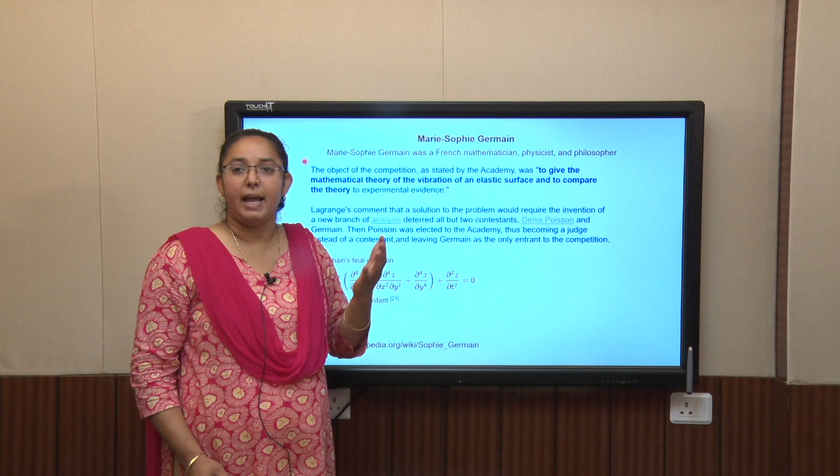During the competition, this topic was assigned, asking whoever would give the equation of motion, and that theory should predict the experimental results. Euler and Lagrange, famous mathematicians, commented that the solution to the problem would require the invention of a new branch of analysis. Then Poisson was elected to the Academy, thus becoming a judge instead of a contestant and leaving Germain as the only entrant to the competition.

She developed the first theory of plates, but at that time calculus of variations was not evolved properly, it was in the initial stage, so there was some discrepancy. This theory could not give accurate results in experimental validation. Later on Kirchhoff did some correction and developed the plate theory. These days we say Kirchhoff's plate theory or Kirchhoff's assumptions, sometimes instead of classical plate theory. Kirchhoff's name is given to the plate theory, but before that the basic equations were given by Marie-Sophie Germain.

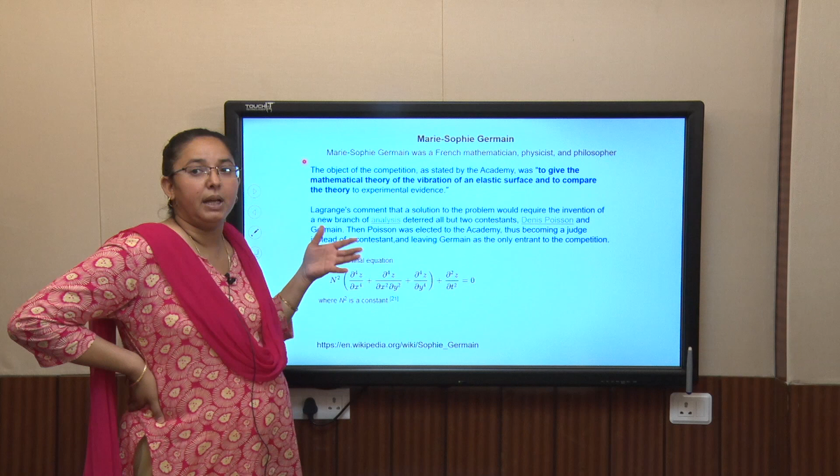It was an area of mathematics; world-level mathematicians were in this field, developing the theoretical analysis for a plate or a beam. In the Euler-Bernoulli beam, Euler was a mathematician, so he developed a beam theory. Similarly Kirchhoff and Lagrange were mathematicians who also made good contributions in physics. But Timoshenko is a very famous name. Everybody, whether undergraduate, masters, or PhD students, has sometimes encountered Professor Timoshenko's books: Theory of Elasticity, Elements of Strength of Materials, Engineering Mechanics.

He is considered to be the father of modern engineering mechanics. Mathematicians developed the theories, so they were difficult to understand for people with an engineering background. Timoshenko was the first person who tried to simplify them, explaining from a physics point of view, so that engineering students and researchers can understand theories like theory of plates and theory of elasticity. These books are written in a very simplified manner, so students without a very strong mathematics background can understand these concepts, and engineers like us can contribute to the development of plate theories.

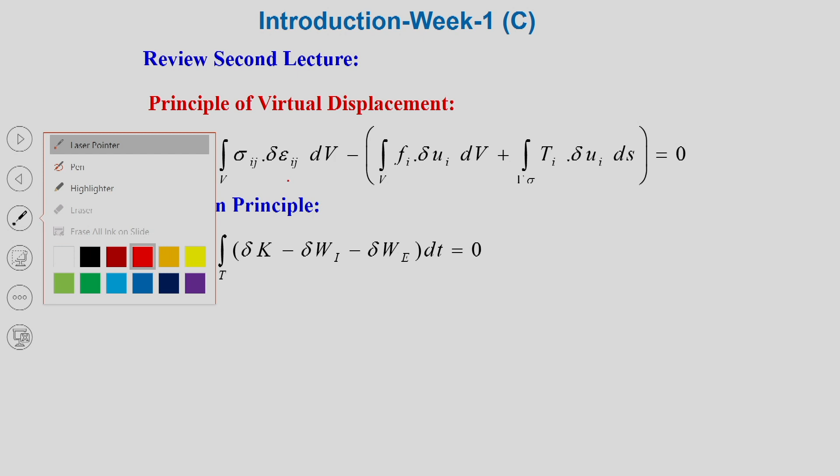So I would like to do a slight correction here: it should be plus, not minus, because already it is minus. If you put it as minus, internal work done will get a minus sign and external work done will get a plus sign.

So most of the time during the first course of solid mechanics, we used to teach the concept of plane stress. This is very much required, because it is a simplified version. Most of the time the thickness of the body is not very high compared to the length and width. Then we can apply this assumption of plane stress. So in 90% of engineering applications, this assumption holds good.

So before proceeding to the main theory, I would like to explain what is the concept of plane stress. For some engineering problems, the state of stress for a thin body or structure is required, in which the dimension along the thickness direction is very small compared to the length and width of the body.

If you encounter a basic fundamental structural element in which length and width are comparable, but thickness is very small, it means you can find out the state of stress of that body using the plane stress assumption. For such problems, the stresses in the z direction become very small. There is also a physical concept behind that: since thickness is very small, it cannot take too much stress.

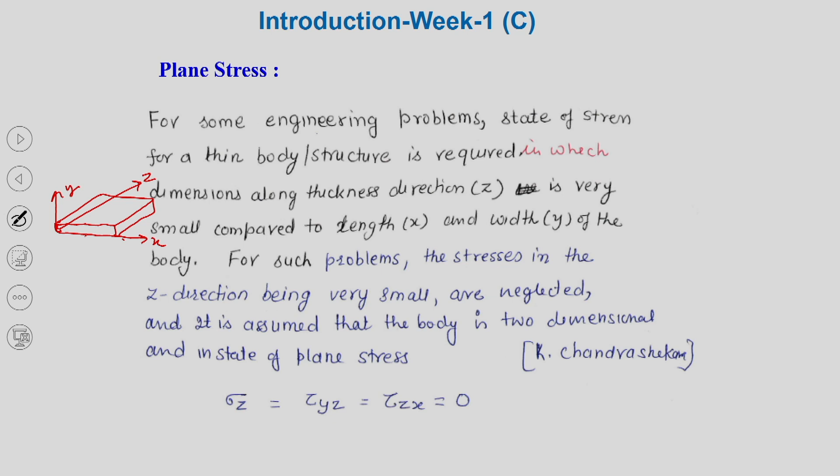Most of the time students get confused here. Let us say a system like this, but I have assigned this axis as x, this axis as y and this axis as z. So you see that along the y direction thickness is small compared to the x and z directions. If you assign the coordinate system like this, then along the y direction stresses will be 0. What will they be? Sigma yy, tau yz and tau yx will be 0.

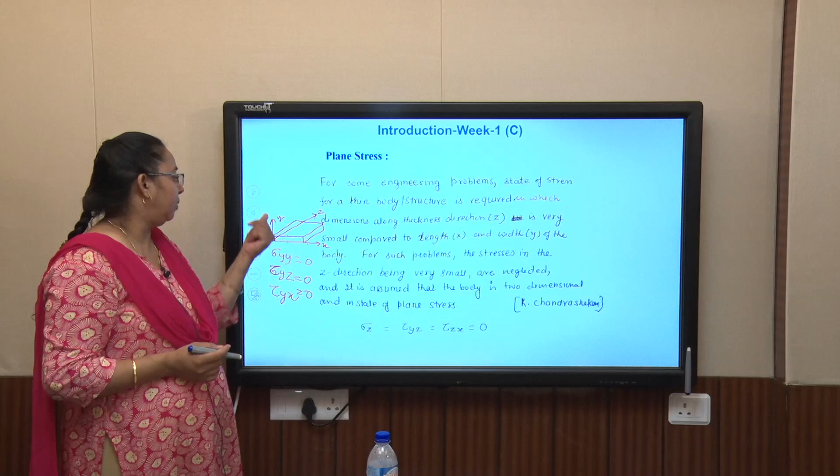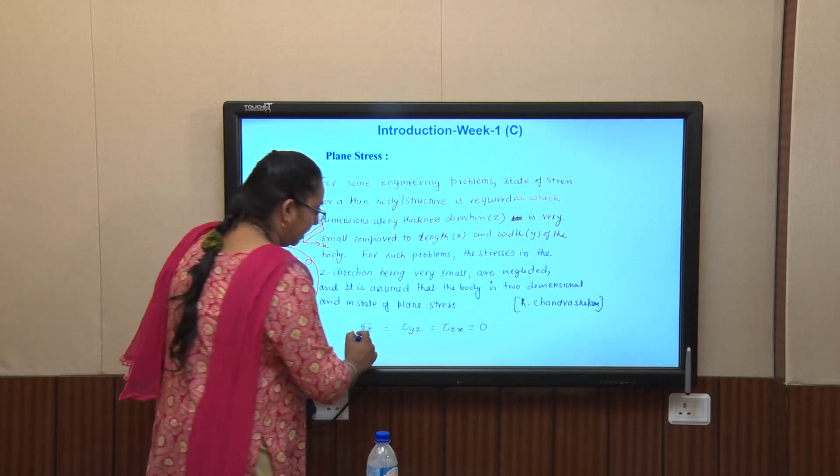So, at the time of interview or when you are going to develop a theory, you did not take care and you have modeled this plate like that, y vertical, x and z longitudinally. In that case the following components have to be 0 if you are applying a plane stress assumption, not this. So, this is when z is the thickness direction.

So, plane stress application, how much? I said that length and width are comparable, but thickness is small. What do you mean by small? This is a qualitative term. What is it in terms of quantity? Which thing can you call small? 0.1 mm is small or 100 mm is small as per your dimension.

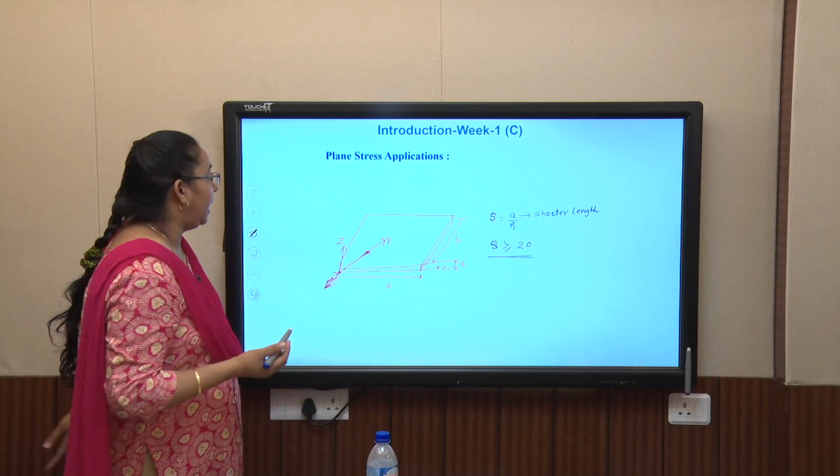Sometimes in civil structural applications, the slab thickness may be 100 mm, equal to 10 centimeters. You say no, it is very big, but if you see, this may be 10 meters long like the roof of this room, or 5 meters long. So, compared to that, if it is 500 centimeters and it is 10 centimeters, then the ratio is coming 50. So, that slab can be analyzed as a plane stress element.

So, you see S, the length to thickness ratio. If this S is greater than or equal to 20, definitely we can apply the plane stress assumption, and the theory will predict more accurate results, near to the experimental results. But if you have S equal to, let us say, 4,

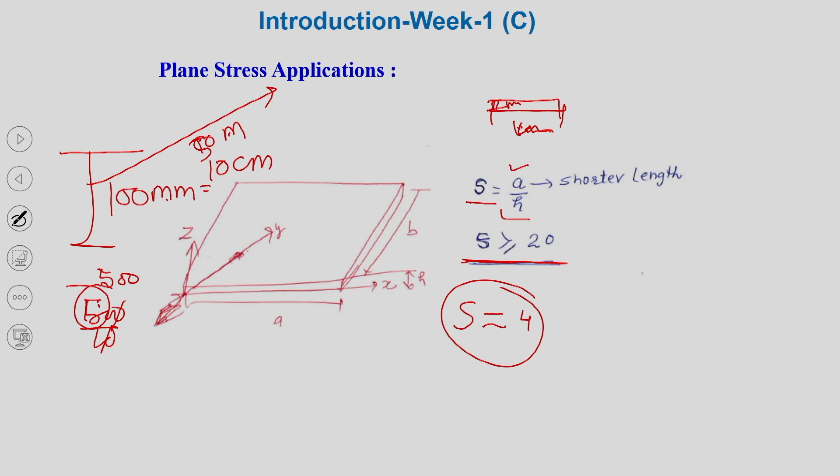then it is not. Like for some mechanical components, you may have 1 mm thickness and this may be 10 centimeters, or this may be 10 mm and this may be 2 mm thickness. You say that I would like to analyze this as a thin plate, but under that assumption it is not possible under plane stress, because length is 10 mm and thickness 2 mm. So, it is giving a length to thickness ratio of 5. So, it is becoming thicker. So, this thickness can resist.

So, most of the time these basic concepts are not well taken care of. You have gone through courses on advanced elasticity, theory of elasticity, theory of plates and so on. But if you do not take care of this and you develop without considering this aspect ratio, whether my theory will be able to predict these things or not. So, when you are going to analyze a structural element, you must first find out these things and then accordingly choose the theory. I will explain that a number of theories are available for different kinds of thickness ratios.

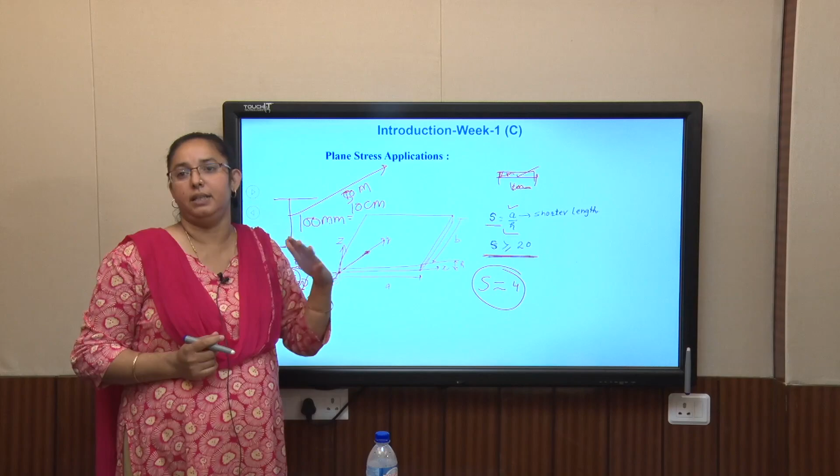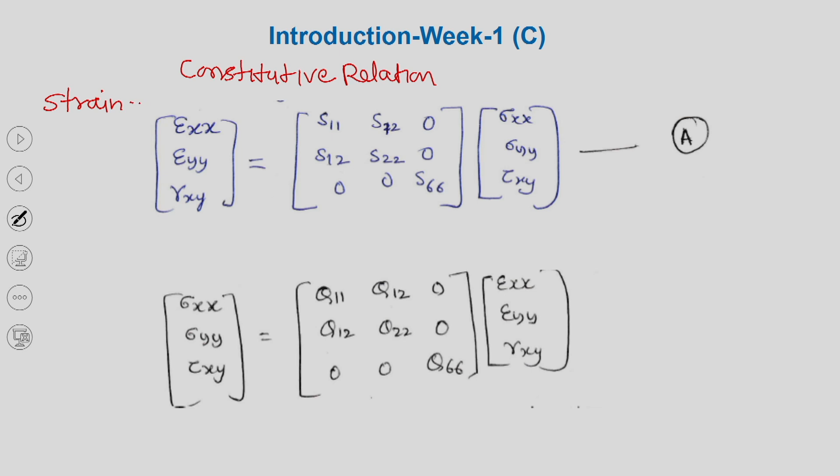So, under that plane stress assumption, the constitutive relations, I would like to say strain and stress relations. We have assumed that sigma zz is 0, tau yz is 0, tau zx is 0. So, you will get only the non-zero components sigma xx, sigma yy, tau xy and their compliance coefficients. So, this is, I would like to say, the reduced strain stress relations for the plane stress case.

Now, if you want to invert it, inverting it gives stress strain relations, where it is represented by Q11, Q12, Q12, Q22, Q66. So, stress strain relations for the plane stress case are reduced to this, where Q11, Q12, Q22 are nothing but Qij, where i goes over 1, 2 and 6 and j also goes over 1, 2 and 6.

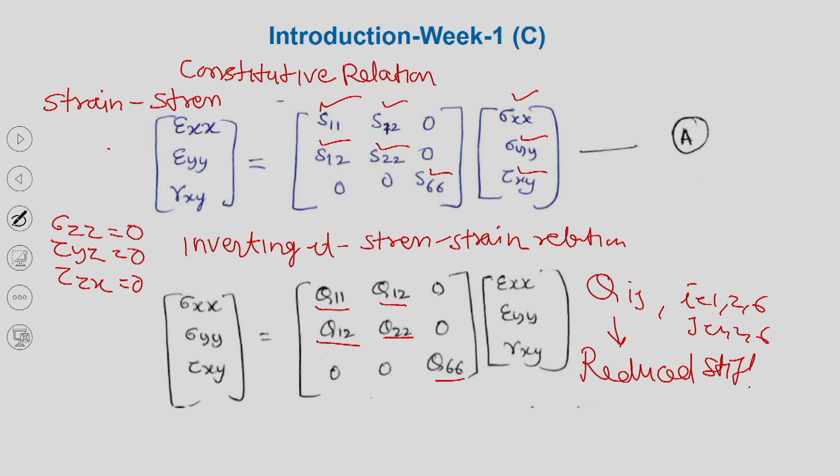They are known as the reduced stiffness matrix, or reduced stiffnesses. Then what are these in terms of compliances? You can see if you are inverting a 3 by 3 matrix S11, S12, 0, S12, S22, 0, 0, 0, S66. If you are inverting that matrix, let us say any matrix S hat, so invert.

So, in that it will have those components S22 by S11 S22 minus S12 square. These are in terms of compliances. As I have told you, engineering constants we are more familiar with, like Young's modulus and Poisson's ratio. Generally, we are able to calculate the mechanical property in terms of engineering constants, because we have a UTM, where we can directly find out the Young's modulus E1, and similarly we can find out the Poisson's ratio or shear

modulus. So, in terms of that, one can see that if it is an orthotropic material, it will be Ex, Young's modulus along x direction, over 1 minus mu xy mu yx. So, the Poisson ratio mu xy is not equal to mu yx for orthotropic material. This is a very important thing, and if you want to write in terms of 1, 2, 3 index form, E1 over 1 minus mu12 mu21, which is equivalent to C11.

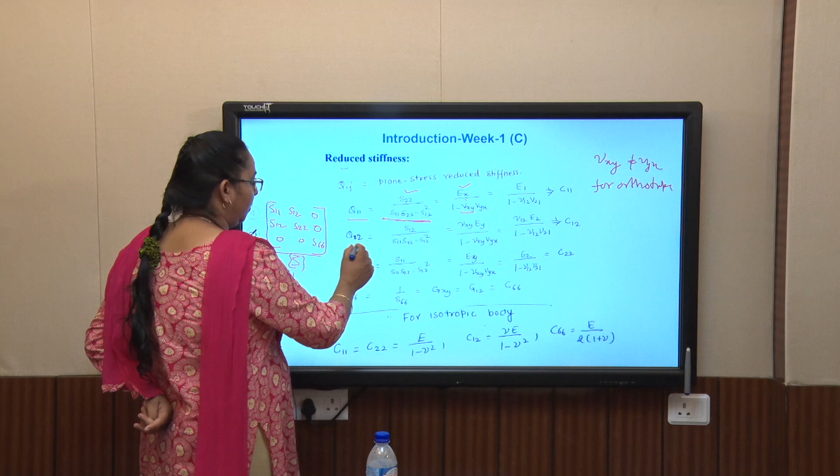Similarly, Q12, Q22, Q66. Q12 is C12, there E2 over 1 minus mu12 mu21; this denominator remains constant, you can remember that. See, Q12 means mu12 and E2, Q22 means E2, Q66 is nothing but Gxy or G12, C66. For the case of an isotropic body, mu12 is equal to mu21, then this relation reduces to E by 1 minus mu square.

So, most of the time when you are going to develop a plate governing equation for an isotropic plate, you need just E over 1 minus mu square. So, you can obtain Q11. Similarly, Q22 will be the same, and Q12 will be mu times E over 1 minus mu square, and these standard sets of relations are given in the book. You can go through the K. Chandrashekhara book or K. Bhaskar book; both are given.

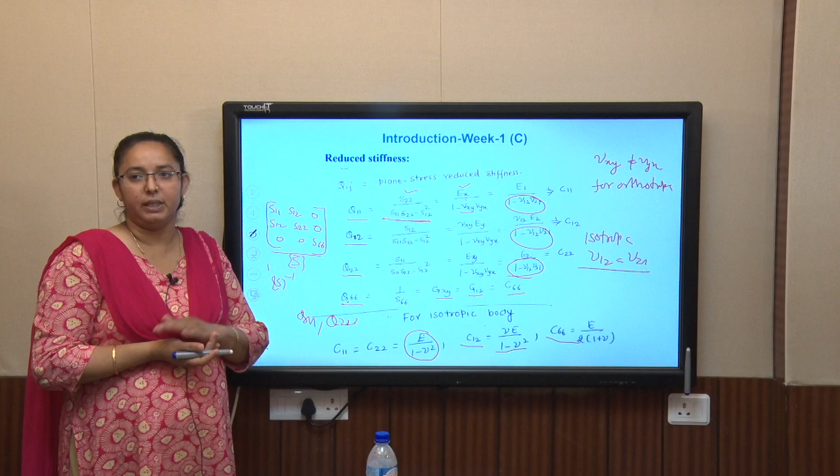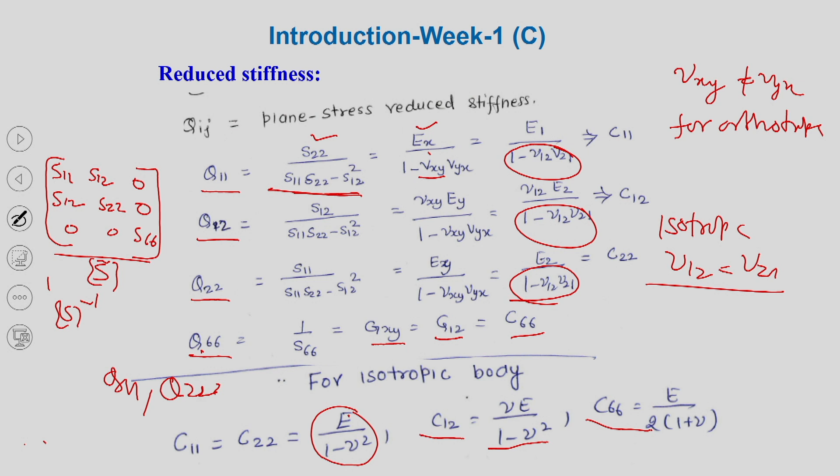You just have to be aware these kinds of things are available. You need not remember the expression of Q11. You must just know there are things like Q11 and Q22, they are the reduced stiffness matrices, and their elements look like that. So, when we are going to apply a plane stress assumption, we have to use Q11, Q22 instead of the normal stiffness matrix. Now, the concept of plane strain and its application.

Plane stress, I have told you, is when thickness is very small. What is the concept of plane strain when you are going to analyze? Let us say there is a bridge or there is an LPG storage tank. I would like to draw it here. LPG storage tank, or you can say an oil storage tank. You will see that whatever the radius, this length may be up to 70 meter, and this may be up to 2 meter or 3 meter,

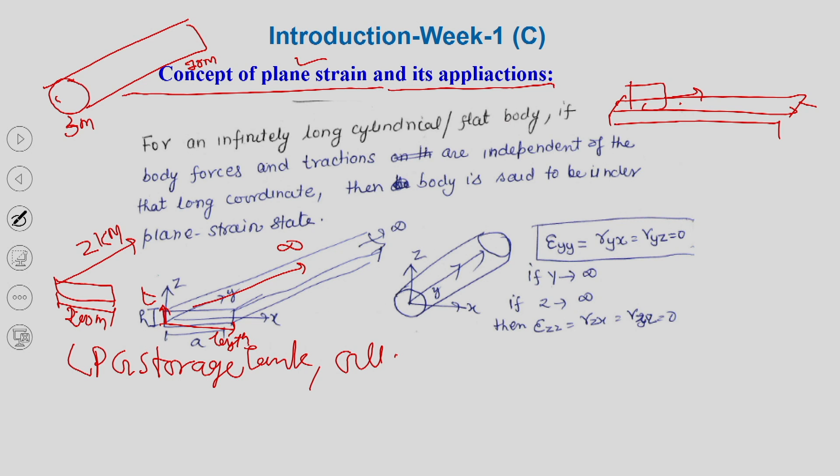So, one major thing you have observed: if one direction length is infinity, and this is your thickness direction and this is your length direction, then we treat it as a plane strain case. You may question that it can be treated as a beam, but the condition of a beam is that this length A is nearly or at maximum 5 times h, not more than that. But if A is bigger than that, let us say 10 times the thickness, say 1 and 0.1, a ratio of 10, then you cannot treat this structural element as a beam element. Then you have to treat it as a plane strain element.

Now, you have got the concept. When the width is considerably more than the thickness, at least 10 times the thickness, then you have to treat it as a plane strain element. If your width to thickness ratio is 2 or maximum up to 5, then you can treat it as a beam, and that comes under the plane stress case; otherwise it is a plane strain case. Similarly, a cylinder which is very long; here also the coordinate system plays a major role in which direction you take.

So, in some of the older books, when we talk about a plane strain case, they say that for a flat panel, this axis is x, this axis is y and z is infinity along the z direction. Then we say that under the case of plane strain, epsilon zz, gamma zx and gamma yz will be 0. It is saying that for an infinitely long cylinder or a flat body, if body forces and tractions are independent of that long coordinate, then the body is said to be under plane strain state.

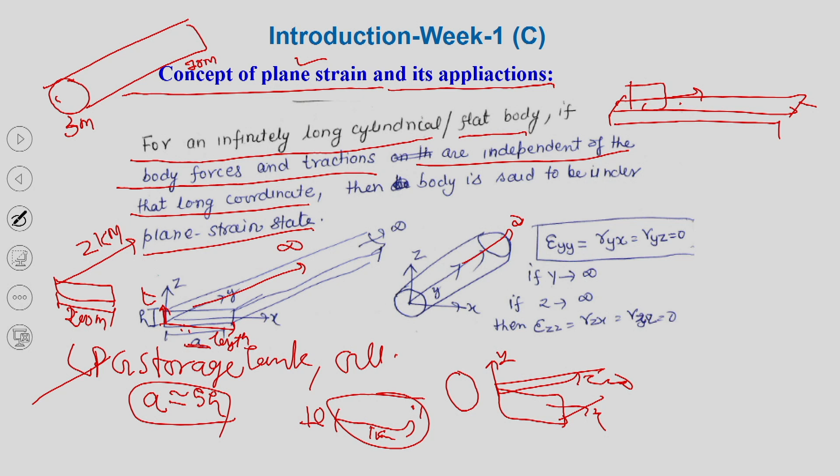So, if I took this as my y axis, in the case of a plate, if you just want a resemblance, z is my thickness, x is my longitudinal and let us say y might be length, and it is very long. So, in that case, if you want to apply the plane strain assumption, what components of the strain will be 0? Epsilon yy, gamma yx and gamma yz have to be 0 if y tends to infinity, which I have written here.

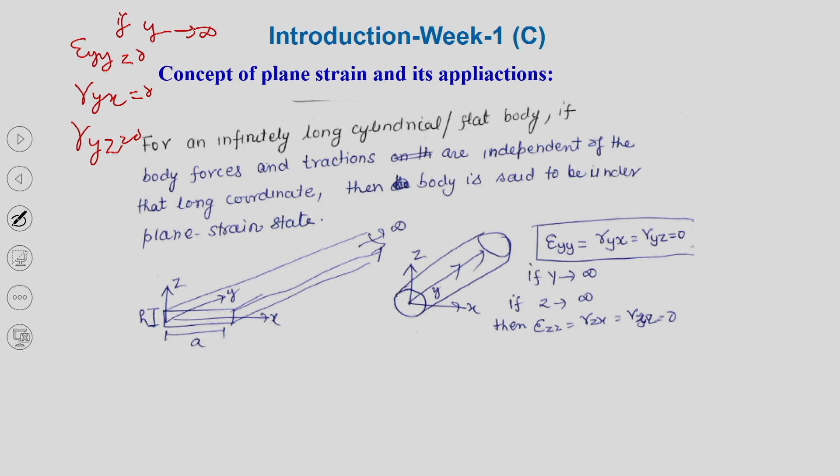Now, I have told you what is the plate, what is the beam, what is the shell, what is the plane stress assumption, what is the plane strain assumption. Now we have a number of models to analyze those plate problems. So we can categorize those theories into some basic classification, with u displacement along x axis, v displacement along y axis, w displacement along z axis.

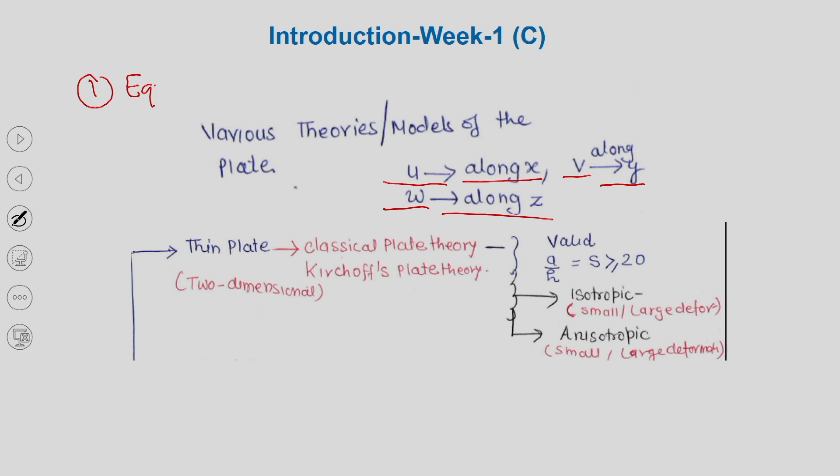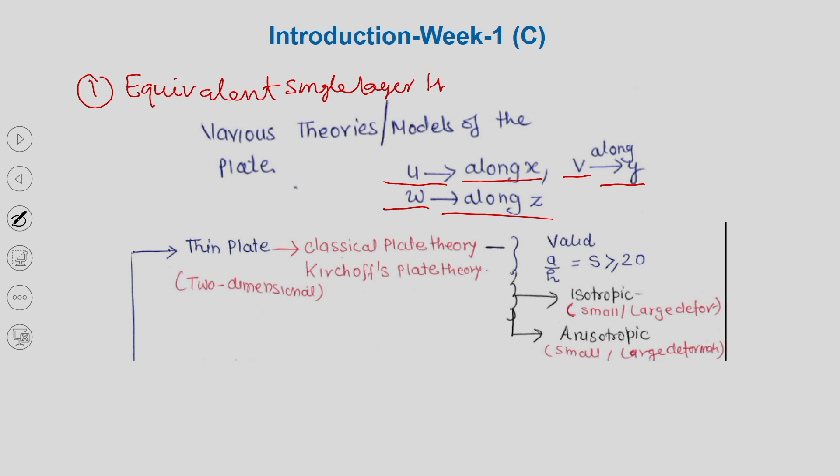So the very first way is equivalent single layer theories. Under that head, it means that we are analyzing, let us say, a plate and it's a single layer.

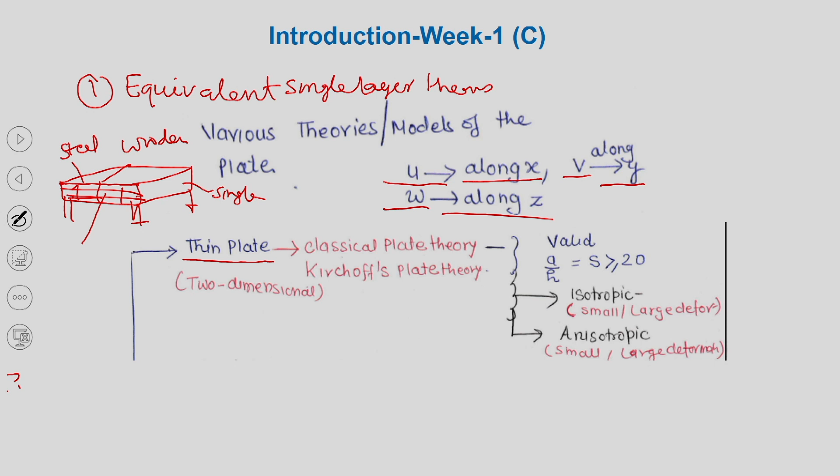Okay. So under that classification, first is the thin plate theory, sometimes called classical plate theory or Kirchhoff's plate theory. These are two-dimensional plate theories based on the plane stress assumption. Their results hold valid when the length to thickness ratio is greater than 20.

Suppose you develop a plate theory and get the result by solving the equation of motion, then you want to compare with experimental results or the real analysis, then it will hold good when a to h is greater than or equal to 20. Under this head, there are theories for isotropic plates, considering both small deformation as well as large deformation.

Similarly, thin plate theory is also developed for anisotropic material, let us say my plate is made of composite or some different advanced materials, which is anisotropic or orthotropic or transversely isotropic. We can develop the thin plate theory under that assumption if the thickness is small compared to the length and width. There may be small or large deformation; for both cases theories were developed.

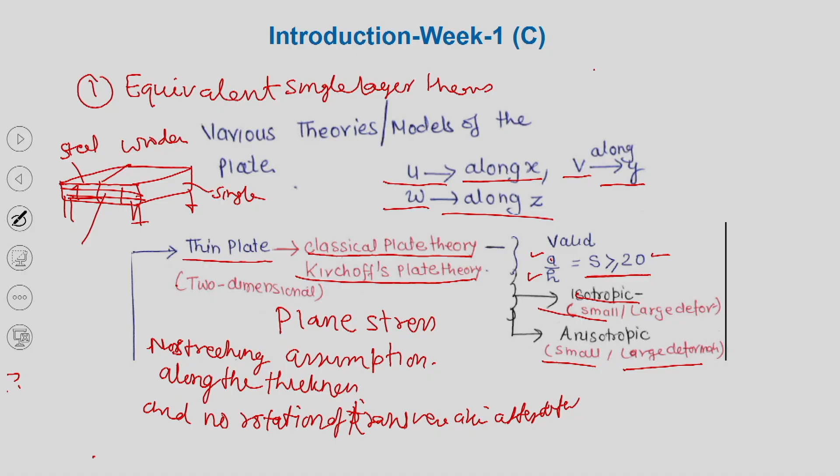So basically in these theories, I must talk about the shear strain, not the shear stresses. Shear strain and normal strains are neglected. If you go to the plane stress case, sigma z is 0, okay, but it does not mean epsilon z is 0, it is not.

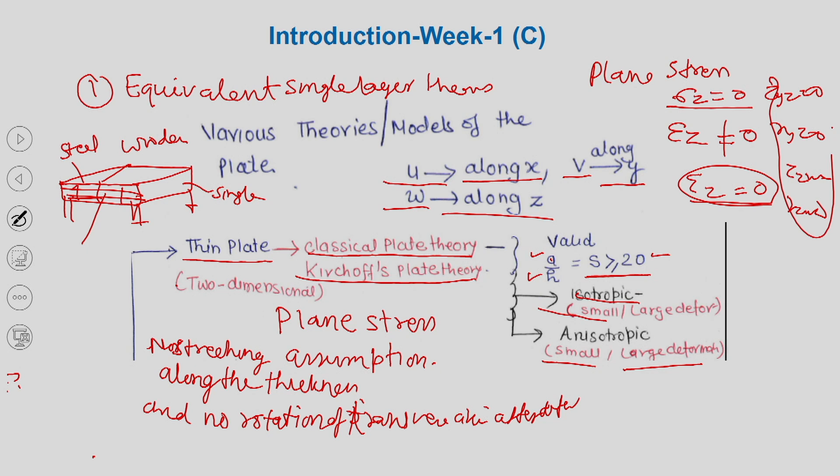But when we are going for a thin plate theory, specifically classical plate theory, there we are saying epsilon z is also 0. If tau yz is 0, it means gamma yz is 0; tau zx is 0, gamma zx is 0. They come from there, but this is an extra assumption.

Next, moderately thick plate theories. Here we assume that thickness is playing a role and there is a deformation, so it can resist the shear stresses or the transverse stresses. That is why moderately thick plate theories are also known as shear deformation theories, and they are also two dimensional theories.

They may be categorized as first order shear deformation theories and higher order shear deformation theories. In higher order, generally we take odd terms like third order, fifth order, seventh order. I will explain later on why we are considering only third order, fifth order, not second order and fourth order.

So, first order theories further isotropic and anisotropic, higher order isotropic and anisotropic. I would like to emphasize here that, let us say, first order theory was developed for an isotropic plate, later on in the 1960s or 70s. Now, your material is changed, your material is piezoelectric or functionally graded, which is an anisotropic material, or some other material, advanced ceramic, or you have included something else, layer wise composite. Then the same theory can be used to analyze an anisotropic plate. People have developed their results using the first order assumptions.

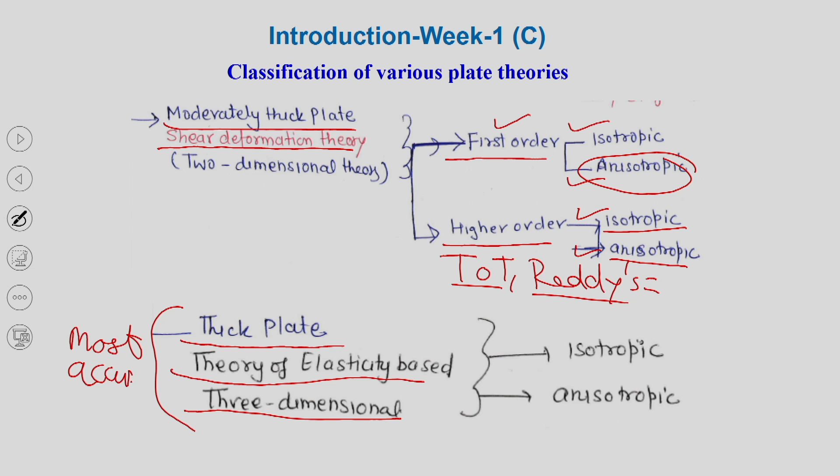Then thick plate theories: when your thickness is not negligible, then you have to go for thick plate theory. These theories are generally based on theory of elasticity and are three dimensional in nature. I would put that they are more accurate, not most, and classical may be just accurate. If you want to understand the mechanics or a really accurate estimation of the stresses, strains or the different boundary effects, then three dimensional theory is required. Whether the thickness is small or big, they can capture both effects. But for these theories, you have to be in that range.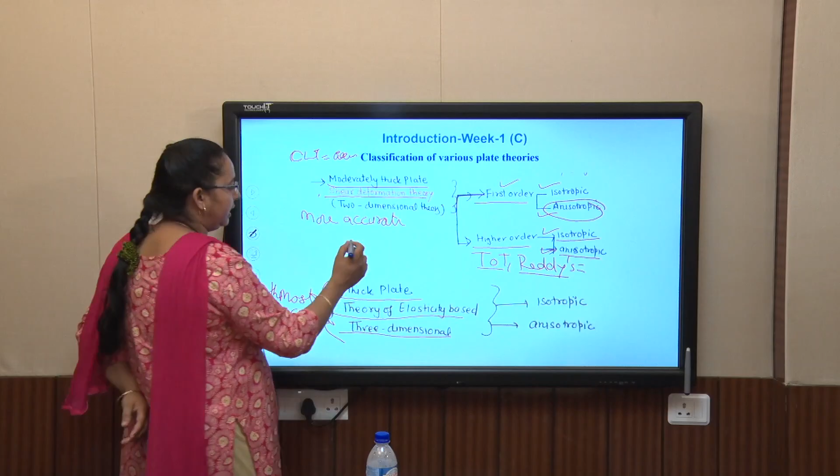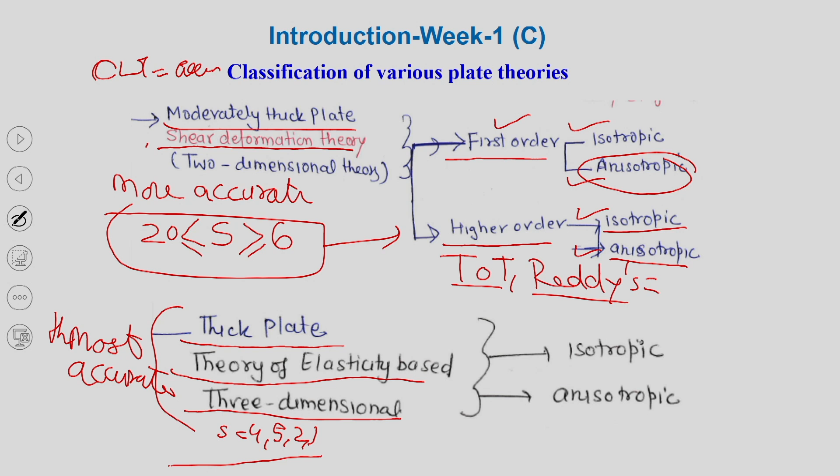So, for this case, S must be greater than, I would say, 6 or 5, and less than 20. In that range, higher order theories give more good results, and when you have S of 4, 5, 2, 3, whatever, they can give you exact solutions. Now, when the plate is made of an isotropic material, there is no layer wise concept, and you do the analysis using third order, higher order or classical. If it is in that range, it accurately predicts the behavior. But when you have anisotropic material, those equivalent single layer theories produce inaccurate results, not completely far but slightly inaccurate results.

So, to overcome those limitations, researchers developed layer wise plate theories or discrete plate theories. Here, the in-plane displacement field is approximated layer wise, whereas W is usually assumed to be independent of Z. If you have, let us say, 2 layers, here to here you will have some variation, U1, and here to here you will have U2. So, each layer will have its displacement field. Previously it was having throughout the thickness, only one variation. So, as the number of layers increases, the number of variables increases, so computational cost increases.

The disadvantage of this theory, though it can predict the results very accurately: practically, a composite laminate or composite plate is made of at least 100 or 90 very thin layers, sometimes 50, and if that theory is applied, the number of unknowns will increase too much. Then the equivalent single layer theories, as I told, in a single layer plate the displacement field is assumed to have a global function dependence.

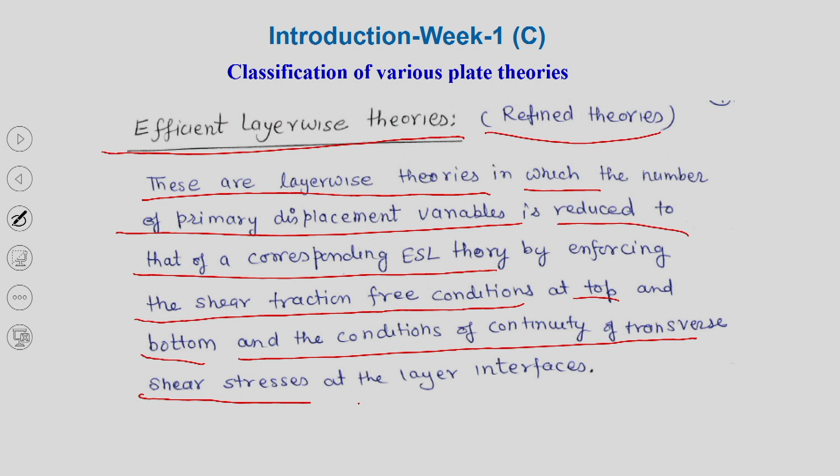What is the meaning of this? Let us say you have a plate, and I am giving an example of two layers. It is saying that at the top and the bottom there are no shear stresses, only top and bottom, and at this interface, for a perfect bonding case. If it is not perfectly bonded, it may slip, so it will not provide the required function. So, for the perfect bonding,

though it is a layer wise variation, whatever u1 you get at this interface from the bottom approach, and then u2 from the top approach, at this interface they should match. If you have gone through a finite element analysis, or developed a solution in Abaqus or ANSYS, you will also see that in the elements, at the junction they should match whether you get it from there or there. Their variation is away from there, but at this junction for a perfect bonding case they match, so that is why it is known as continuity of transverse shear stresses.

So there they are saying that tau yz and tau zx, basically transverse, and sigma z have to be continuous over the surface, as well as displacements later on. Otherwise, there will be slipping of the plate if this continuity is not maintained. So, people have done the analysis of imperfect bonding. There you can assume that whatever you are getting from u, there is a sudden jump, or whatever shear stress you are getting from the bottom and the top plate may be different.

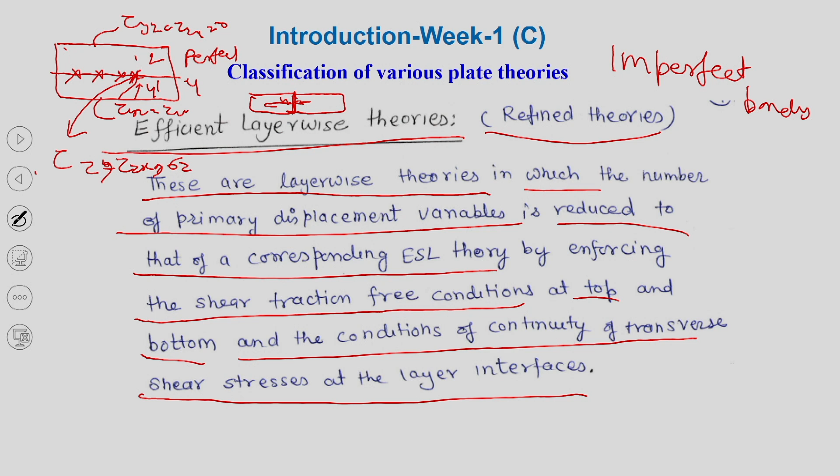In a real scenario, yes, but the theory becomes more complicated; then we have to consider imperfect bonding. It will have more complex cases, but it will be nearer to the real picture. Actually, slight motion may take place. Like in engineering mechanics, a perfectly rigid body is just a hypothesis that a body cannot deform, but if you apply a pressure, it may deform slightly. Similarly here, there may be some imperfection. That can be taken care of, but then the basic concept of the theory will change.

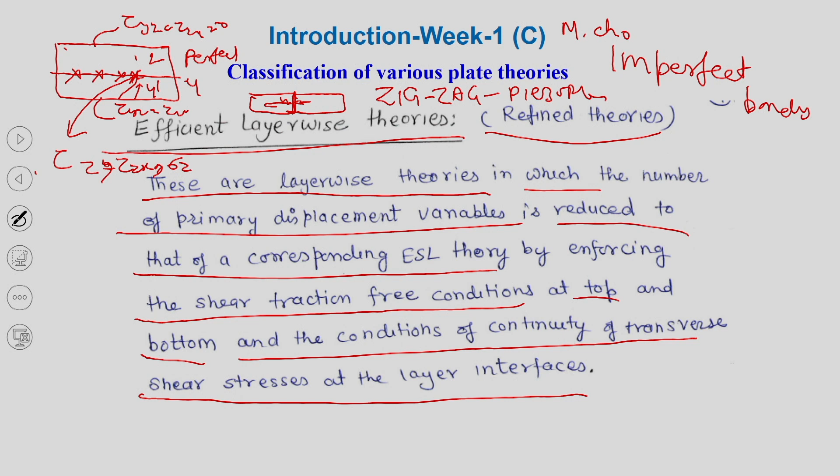So, I am talking about this layer wise theory where we have the condition of continuity of shear stresses and top and bottom free. One such theory was developed by Professor Kapuria for the piezoelectric plate, the zigzag theory. For the elastic plate it was developed by Cho. So, these theories are known as efficient layer wise theories.

Now, I would like to explain that you have thin and thick plates, which you can define based on some geometric parameters, but there are also classifications based on the approach. Basically 3 approaches are there. One is the displacement based approach, second is the stress based approach, and third is the mixed approach, which is, I would say, a recent concept. In the displacement based approach, and you will find 90% of plate theories are based on it, we assume the displacement field first, then find the strains and stresses, and then using the principle of virtual work, develop a set of governing equations and solve it.

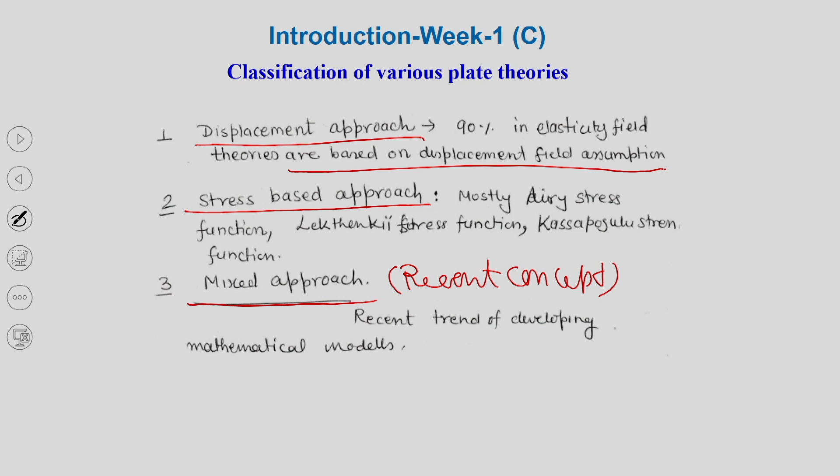Another case is the stress based approach. The stresses are known or assumed first, and then by integrating, from the stresses you find the strains, and from the strains you find the displacements. So, it's the reverse approach. In the first approach you do differentiation.

Here you do integration. So, you are going back. So, for stress you assume something, then you find out the strains using the constitutive relations, and then find out the displacements by integrating of u.

So, generally in theory of elasticity we go for Airy stress functions, Lekhnitskii stress functions or Kassapoglou stress functions. So, you assume those functions and try to satisfy the equation of motion and solve those stresses. Once you know the stresses, then you can find out the strains using the constitutive relations. Once you know the strains, then you can go for the displacements.

Then we have a mixed approach concept. Under this mixed approach concept, we take field variable displacement as well as the stresses. So, generally if you see my research papers, there you will find we have used the mixed approach for developing 3-dimensional solutions. The concept, why we are going to this, what is the discrepancy with that?

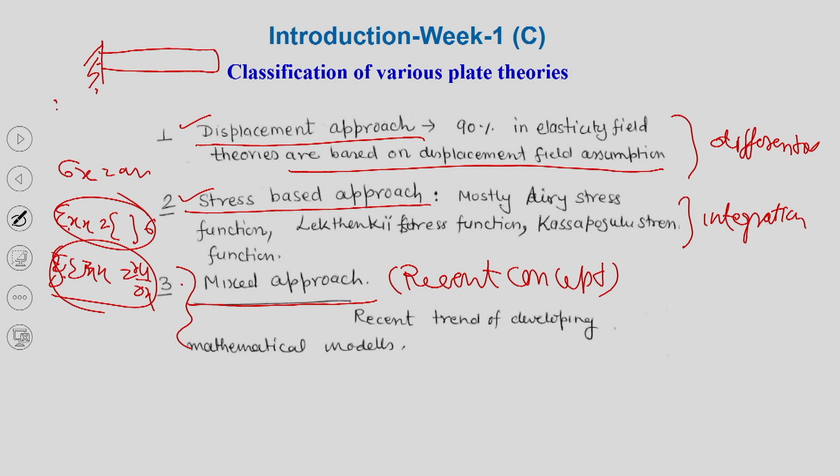Generally, displacement based approach can give very accurate results if the boundaries are in terms of displacement. Let us say if you have a fixed beam, it means here u is 0 and w is 0, so boundary conditions are in terms of displacement. And let us say again you may have fixed. There may be cases where, in displacement based approach, the displacement boundaries are satisfied exactly, but if

here is free, it means displacement can be anything, but stress has to be 0. The stress resultant, if I talk about that, has to be 0. So, along the thickness direction we are satisfying the stress resultant conditions, not the stresses at every point. Similarly, the moment resultant has to be 0. So, when we are interested in some local effects, then these theories may not provide accurate results.

Now, come to the stress based approach. The boundary conditions in terms of stresses are satisfied very nicely, but displacement boundary conditions again have to be satisfied in integrated form or some other form. So, mixed approach is required because if you see the cantilever beam, it is a mixed kind of boundary conditions. At one edge all the stress components are 0, at the other edge all the displacements are 0. So, this is the mixed kind of

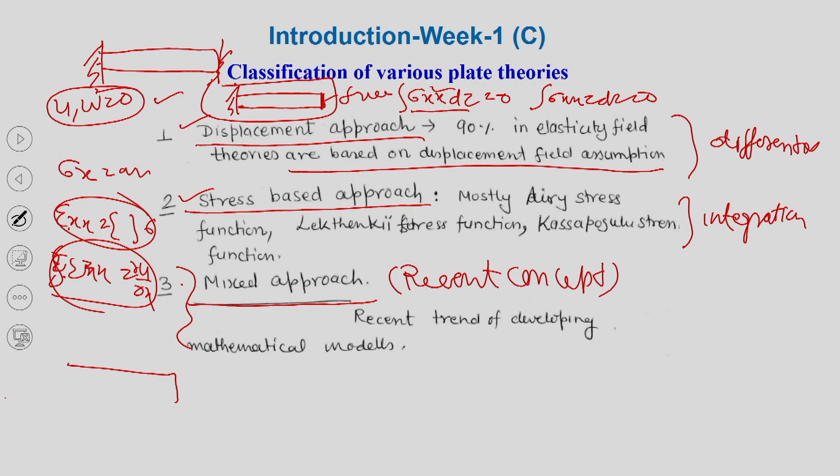boundary conditions. So, if we have a mixed approach in which you have displacement as well as the stresses, you can satisfy the boundary conditions exactly, or I would like to say in a more accurate sense. If we talk about 3D, then we say exactly. If you talk about 2D, then we say in a more accurate sense.

So, just by looking at your displacement field assumption, I can tell you how many governing equations or equations of motion you will get. You will get 3 equations of motion. If you have an FSDT theory, then you have phi 1 and psi 1 and these 3. So, 3 plus 2, there will be 5 unknowns.